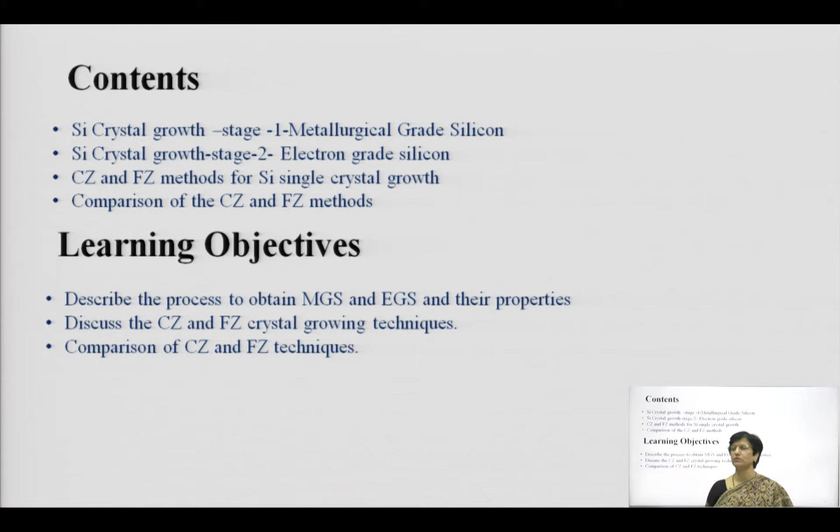The learning objectives are describing the process of silicon growth, which starts with MGS and electron grade silicon preparation, and finally being able to compare both crystal growth processes: the Czochralski crystal growth process and the float zone process, that is, comparison of both processes available for silicon growth.

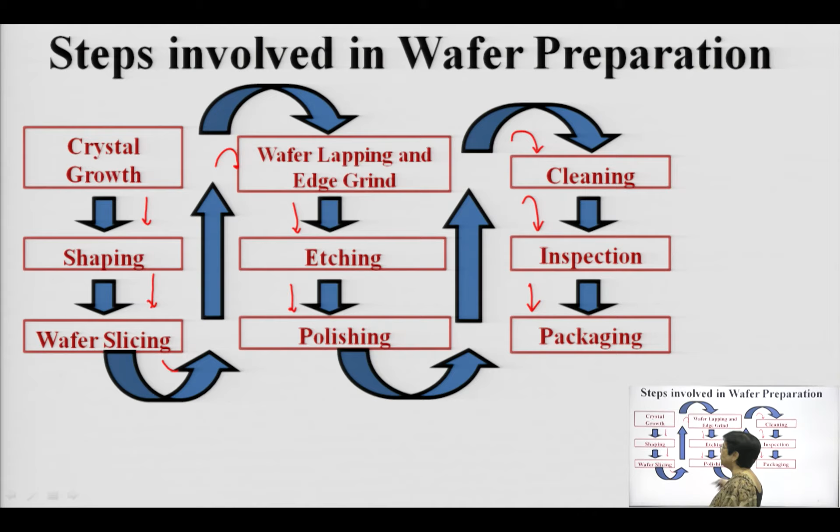How does the growth process start? It starts with single crystal silicon getting formed, followed by shaping, then wafer slicing, then edge cutting for identification marks, then etching and polishing to a mirror polish so wafers become as shiny as a mirror. At every stage there is a cleaning process, then inspection of wafers, and finally packaging. These are all the steps involved.

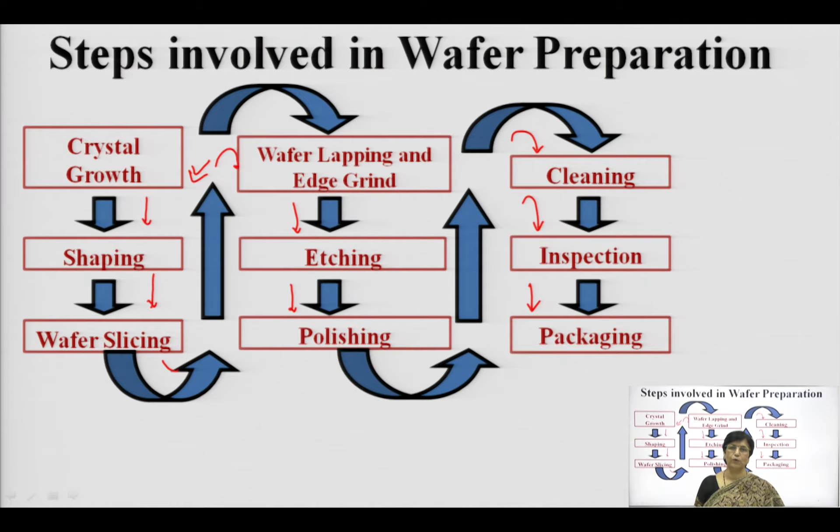Out of all these steps, in this lecture we will first focus on the crystal growth stage, where a single crystal is grown right from sand. So how is that done?

Stage 1 is obtaining sand. This sand is obtained from the clean beaches of Australia, and it is basically from the earth's crust. The sand obtained is combined with coke and coal, and then heated in a submerged arc furnace up to 1600 degrees centigrade.

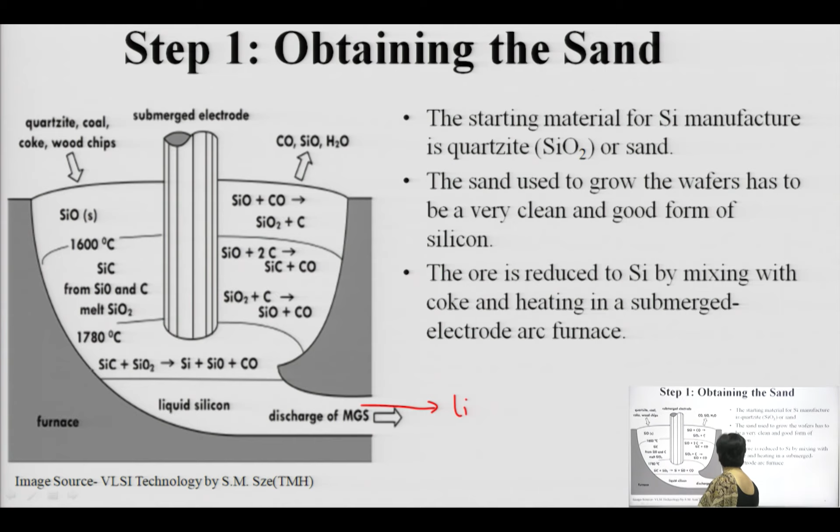This is a very thermally intensive process generating a lot of energy, approximately 13 kilowatt hours per kg, at a furnace temperature of around 1600 degrees centigrade. Here the silicon mixed with coke and coal combines with silicon dioxide, giving us silicon in liquid form, SiO in gaseous form, and carbon monoxide in gaseous form. So we obtain metal grade silicon in liquid form.

This metal grade silicon has a lot of impurities, so we carry out pulverization with this silicon to react with anhydrous hydrogen. In this reaction, a trichlorosilane is formed, which is the most recommended and stable material widely used for preparing silicon wafers. The metal grade silicon reacts with anhydrous hydrogen to give trichlorosilane, with byproducts released in gaseous form.

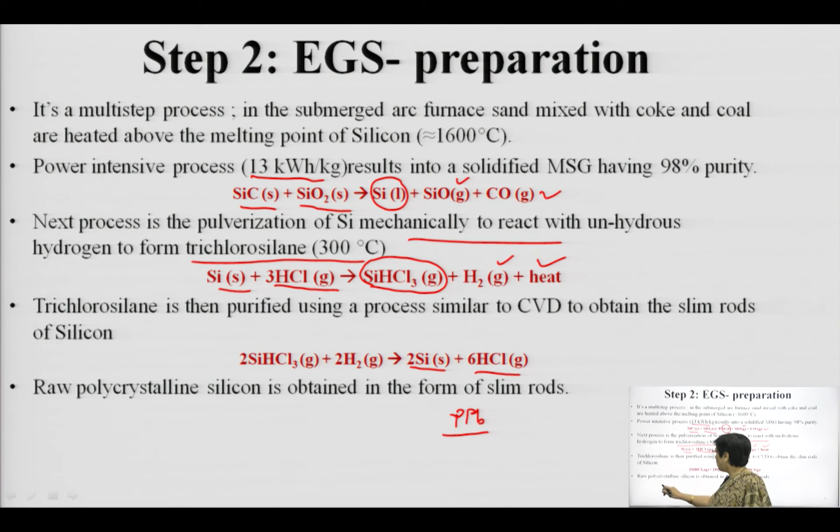The trichlorosilane is then purified to obtain silicon with comparatively less impurity, to the extent of parts per billion, containing some manageable metallic, oxygen and carbon impurities. Another property of this raw polycrystalline silicon is that it is a polycrystalline material in the form of rods; this is the structure in which this material is available.

These materials undergo a further process: from silane we can carry out pyrolysis at 900 degrees centigrade to obtain the same polycrystalline silicon in the form of rods. This polycrystalline silicon is the base material used for preparing single crystal silicon. The advantage of pyrolysis is that byproducts can be easily disposed, and it is cost effective and less expensive, which matters since worldwide consumption of silicon is so large. Therefore we prefer this economical process, and pyrolysis is preferred.

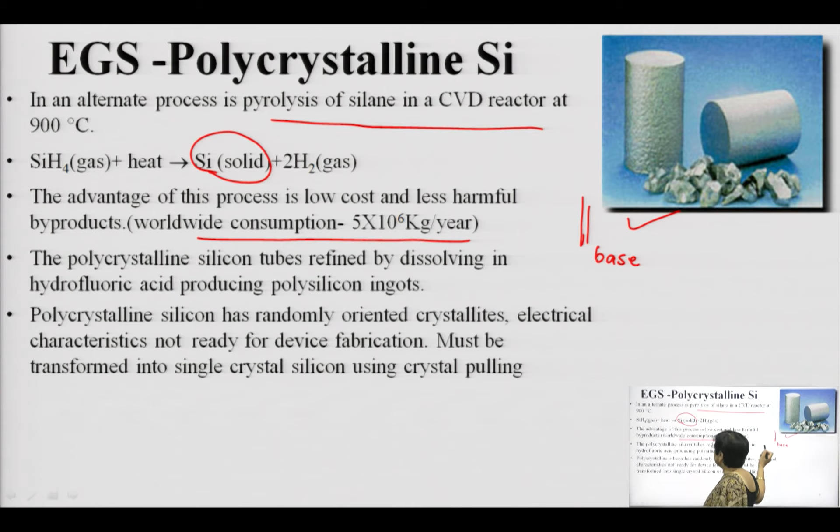These crystalline, multicrystalline, polycrystalline silicon rods are then crushed, and subsequently we proceed to produce high purity polycrystalline rods, which can have impurities such as arsenic, boron, phosphorus and antimony.

It is melted at 1400 degrees centigrade in the quartz crucible. Molten impurities that still exist will slowly get deposited in the molten silicon, and slowly the single crystal silicon wafer will be grown. The process is called silicon growth because from the molten substrate you are having a crystal getting grown or developed, and this is the furnace known as the Czochralski furnace, which is used for this particular purpose.

Now there are 4 factors, please remember, 4 factors which are governing the entire design, and those we are going to see subsequently. But this is the main process which is widely used, globally used, for preparation of pure single crystal silicon or monocrystal silicon.

Now it is somewhat similar to what we used to have, Buddhika ball, in the earlier days when we were young. In that Buddhika ball also, that person used to have sugar syrup and dip one stick, then rotate that stick, and have this strand of sugar getting deposited on it, and we used to have that Buddhika ball getting created. So this is somewhat similar to that.

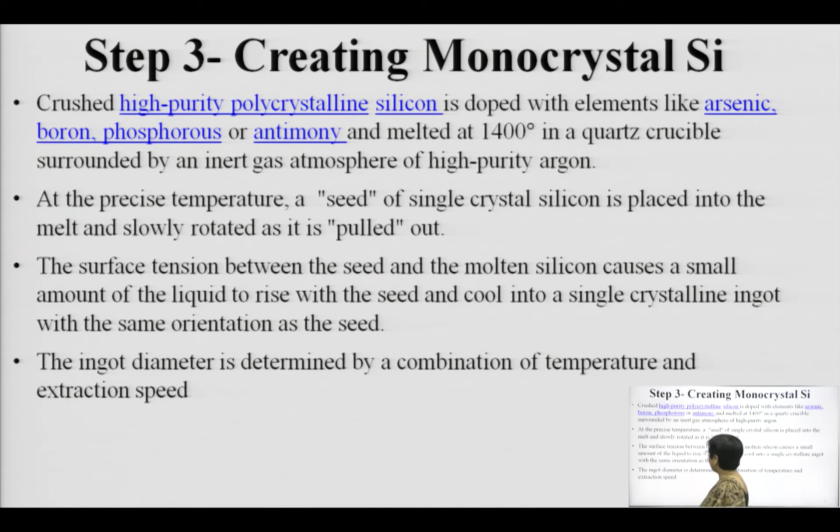You are having molten silicon, and inside this you have a dopant, and this dopant will give you the flexibility to design, develop, or grow the silicon. Molten silicon will be solidified and the crystal growth will happen.

Now the important aspects we need to study in this case, the very first thing is the crucible. Since the molten silicon is at very high temperature, higher than 1400 degrees centigrade, the material used for the crucible has to be chemically inert. That means the material should not release any impurity into the molten silicon at that high temperature.

Secondly, the height and diameter also should be good, and that is how it is theoretically proven. There are a lot of calculations going into the dimension design, and the proposed design largely used contains approximately 60 kg of molten silicon, with a height of 45 centimeters, and a wall thickness of around 0.25 centimeters.

Thirdly, the chamber in which this entire molten silicon is present should be chemically inert, because any impurity can contaminate the molten silicon. As it is at high temperature, the reactivity at high temperature can further contaminate the molten silicon, and the same impurity can get introduced into the single crystal being grown.

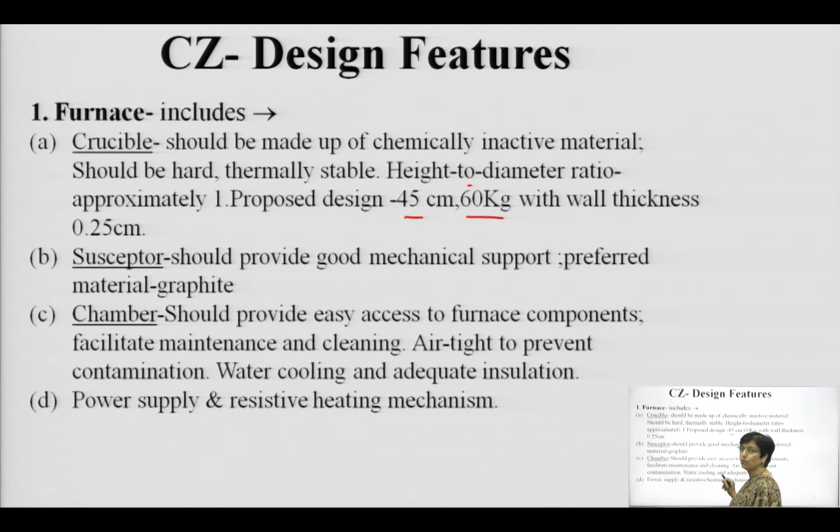The second aspect of design considers the crystal pulling mechanism of this CZ process. In this process, the seed crystal that you are going to immerse into the molten silicon has to be held in a very stable manner by a chain and pulling mechanism which lifts the seed crystal at a defined or precise rate. Any jerk can damage the orientation of the crystal.

So this particular feature is very important, the system should be very stable - the chuck and the rotation. When you are lifting the silicon ingot or seed crystal, you are at the same time rotating it, one going clockwise and the other anti-clockwise, because unless you rotate it there will not be uniform deposition as it solidifies and grows slowly. If you do not have the proper pull rate, any negative pull rate will melt this seed crystal back into the molten silicon. So we do not want that to happen, and therefore the pull rate is very important.

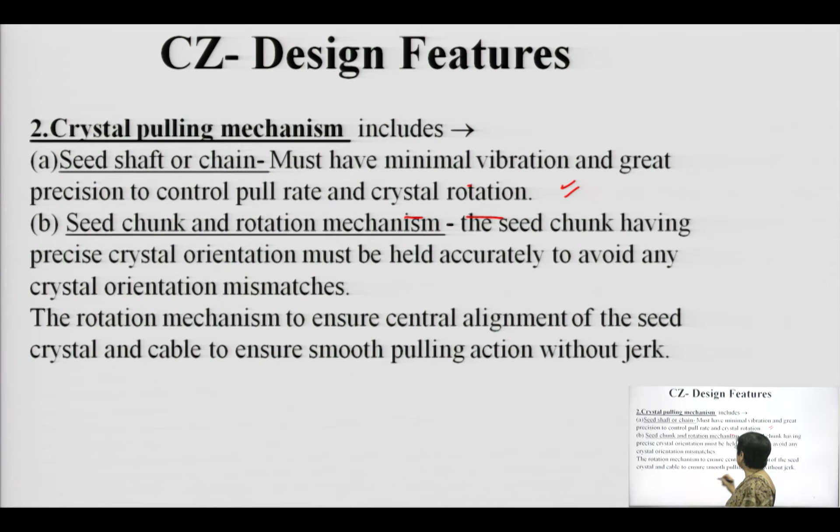The seed chuck, which is held by the chain pulley mechanism, has to be very stable and precise, and the orientation or rotation mechanism should exactly ensure that the central alignment of the seed crystal exists throughout the process. Third and the most important thing is the ambient.

Any gases which you are controlling for cooling or using for cooling, or driving away the byproducts, should be all inert. The entire system should be vacuumized and you should have minimum contamination. The use of inert gas is encouraged for driving away those byproducts, and the purge tube through which the wafer or seed crystal is inserted and taken out also needs to be properly isolated from the furnace.

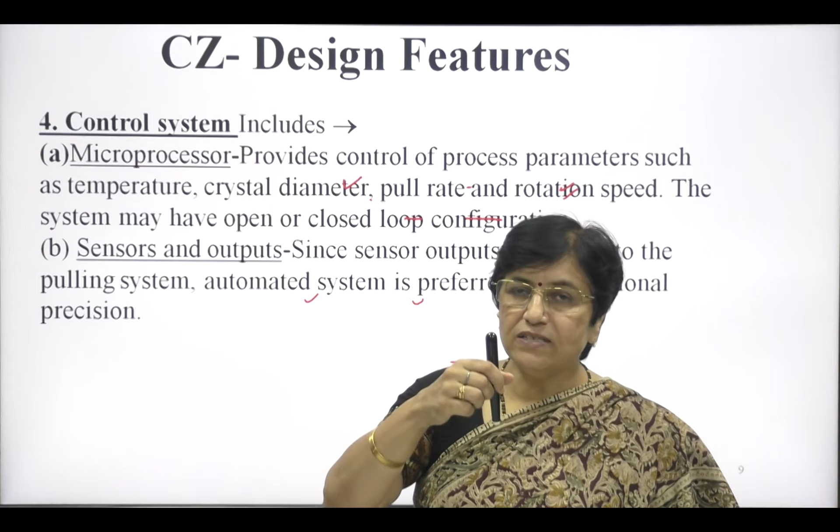Lastly, the entire control mechanism, wherein you have the stable crucible rotation, the crystal pulling mechanism, the chain pulley mechanism which is lifting the crystal while simultaneously controlling its rotation, all that mechanism should have minimum intervention of human beings. All these processes need a lot of precision, and therefore it is essential to have a complete microprocessor-based or automated system to take care of this mechanism.

Now, I gave you the resemblance—it is just like sugar candy getting produced from molten sugar. Similarly, from molten silicon, this solid silicon is getting formed. Whatever orientation this seed crystal has, the same orientation crystal growth will happen, and the rate has to be exactly controlled—there goes the mathematics behind this crystal growth mechanism.

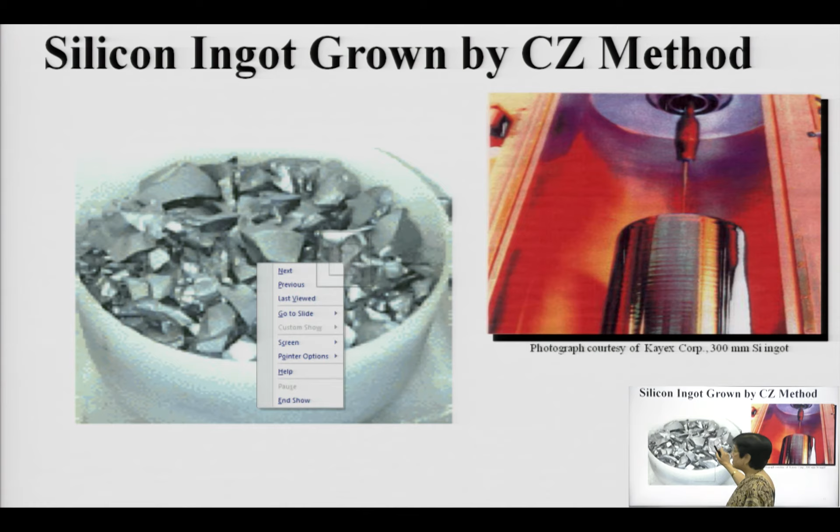So this is the original polycrystalline silicon, and this is the final ingot. In between, the processes happening are being depicted: the seed is dipped into the molten silicon, then lifted slowly—this is how the ingot is formed, and this is the final ingot being formed here.

So right from polycrystalline, you have developed pure single crystal—single crystal silicon wafer. So this is the single crystal silicon wafer; you have gone for monocrystalline. So what is the mathematics behind it? As an engineer you must know what is happening in it, what exactly is the process.

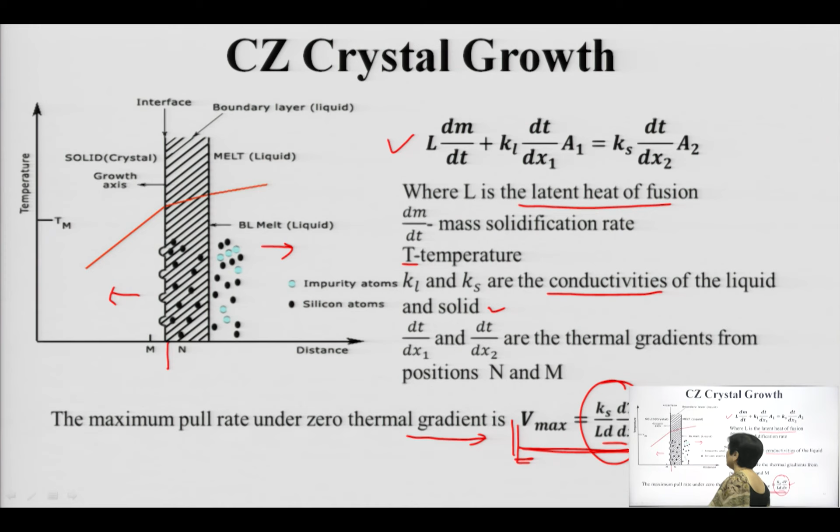Another mathematical analogy you need to study to control the growth rate is the equilibrium distribution, or segregation coefficient. This segregation coefficient is defined based on two factors, Cs and Cl. Now, what are these Cl and Cs?

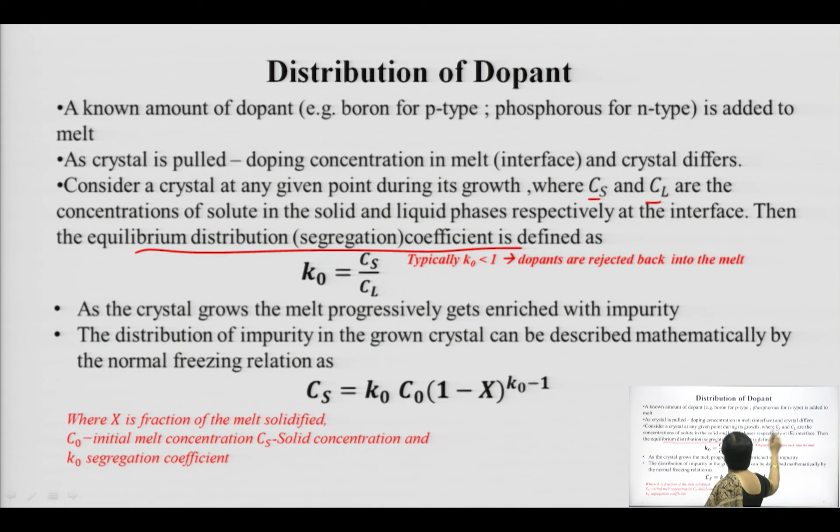These are basically the solubilities you can say, or these are basically the concentrations of solute in the solid and liquid phases respectively. As you know, the molten silicon has impurities in it.

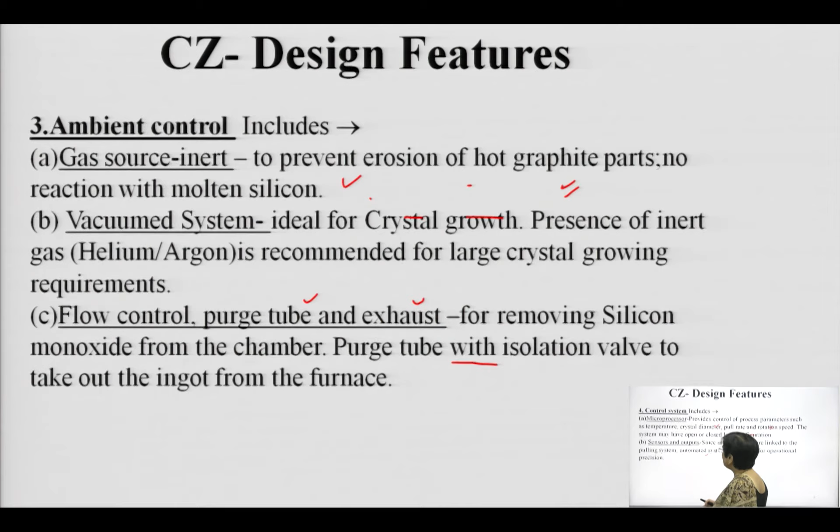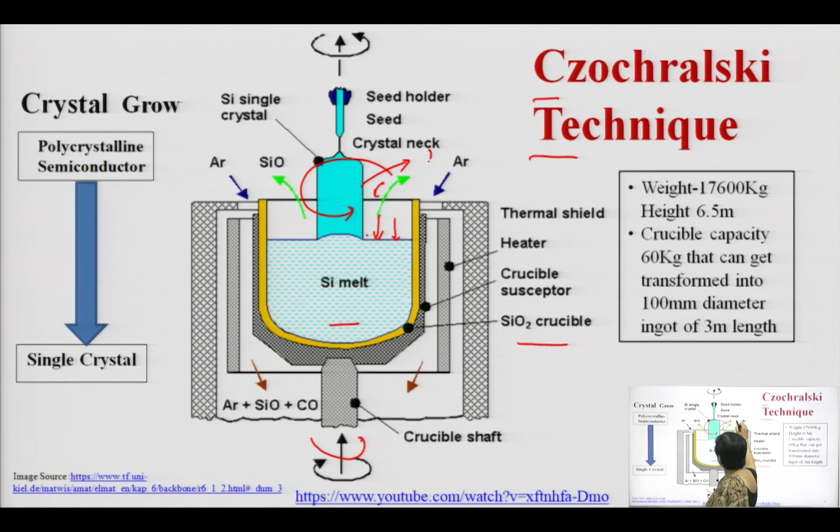As the silicon growth happens and the crystal grows slowly, the crystal will be in pure form and the concentration of impurity in the crystal will increase slowly as growth happens. That means, when my crystal growth is happening or when my crystal is completely formed, I need to know when I'm supposed to stop. That means, this growth till what point of time I need to grow, till what point I need to stop this growing process, is being defined by this particular equation, and this equation gives you clarity about it.

So, therefore, you need to know the equilibrium distribution or segregation coefficient. This coefficient decides the ratio of solid phase solute, whatever concentration of solute is available in the solids, and concentration of solute available in the liquid phase. This ratio is always typically less than 1, because dopants, as the silicon solidifies, the dopants or impurities are rejected, and more and more impurity concentration in the molten silicon increases as the crystal growth process happens, except for oxygen and carbon many times. For some applications, you try to keep it this way.

As the crystal grows, the molten silicon is enriched with impurities, and you need to know that means at first, when the process starts, you will have pure crystal. As the growth process happens for a time interval t, the impurity addition into the single crystal keeps on increasing as the crystal grows, and therefore, the maximum point, this is the final point you need to know, is the normal freezing relation. This freezing relation defines till what depth or till what rate you need to grow the crystal, and what is the concentration increase or rate at which the concentration increases in the molten silicon.

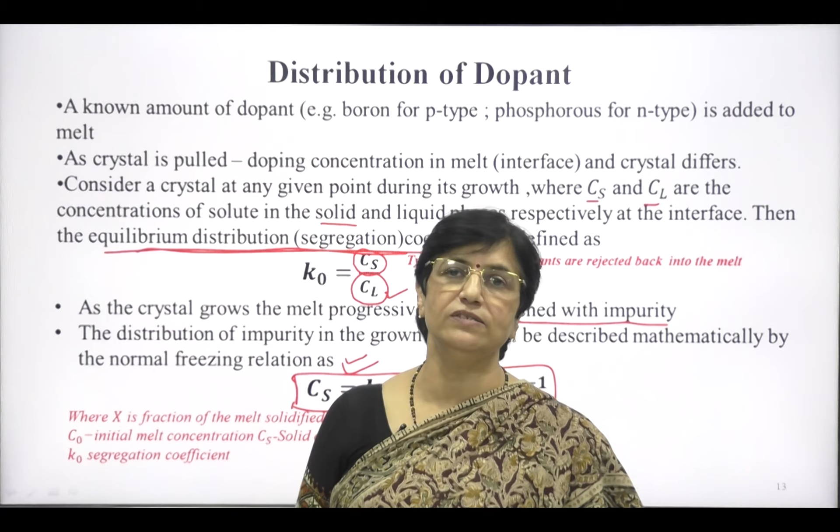This is basically x, the distance for which the crystal is grown, and this distance is an essential component in the growth process. You have to remember that negative growth indicates the seed getting molten into the molten silicon, or basically you are having the reverse process. Growth happens because the seed crystal and the solidification of silicon increase the seed crystal, and therefore we call it growth.

So this is how the similar orientation of the seed happens, and this particular equation gives you the idea up to which you need to continue the crystal growth process, because when the impurity increases you need to stop, since that silicon ingot becomes of no use. Therefore, this freezing relation is important to check what is the growth rate or how much crystal can be grown from the amount of molten silicon kept in the crucible. So this equation is basically K0 into C0 into 1 minus x raised to the power K0 minus 1.

Now, K0 is nothing but the ratio of impurities in the solid and liquid, and this ratio is equally important in deciding the growth of the silicon ingot from the molten silicon. So, C0 is the initial melt concentration, Cs is the solid concentration, and K0 is the segregation coefficient, as we have already studied.

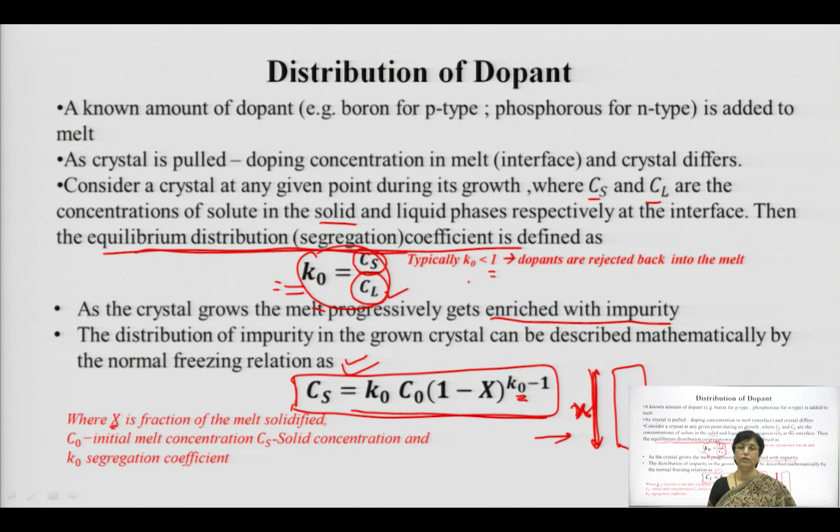So this mathematics basically gives you the idea of the rate at which the silicon wafer or silicon ingot can be grown with the help of the seed crystal from the molten silicon, and within the molten silicon the ratio of impurities in the solid and liquid decides the segregation coefficient. So that ratio is also very important. Along with it, the maximum pull rate is also important, as we have seen in the earlier equation. So all these factors will decide the amount or height of the ingot which is getting formed, as well as the diameter of the ingot which is getting formed.

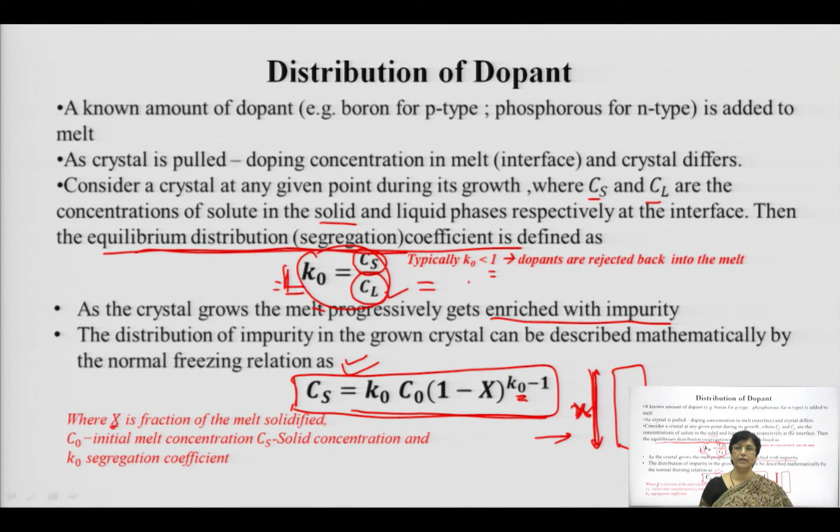Another process in this crystal growth is the localized heating process, known as float zone crystal growth process. Now, instead of a crucible, in this process we have RF coils which are heating the polycrystalline ingot, and this polycrystalline ingot is locally heated.

Locally you are creating a molten area, and from that molten area you bring the seed crystal in contact with it. Again, pull rate and the segregation coefficient and other factors come into picture, and the same thing is done, but rather than holding the molten silicon in a crucible, we are heating it locally.

From that local heating area we are growing the seed. Now what is the difference? Here also you have inert gas flowing to drive away the byproducts, the molten zone is confined, and you do not have any crucible to hold this particular molten silicon.

The ingot is the same, the seed crystal is of the same orientation, and it is the product which decides the growth rate. Apart from the localization in heating used for melting the silicon, most of the other parameters or mathematical analogies are almost the same.

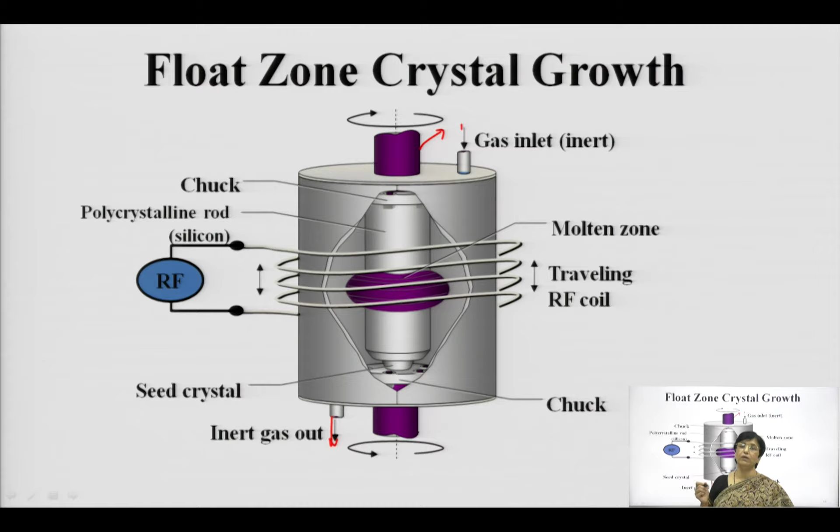Only thing is, since the crucible is not being used, there has to be a lot of precision involved in pulling the seed crystal, because the area is confined. The main difference between the float zone and the normal processes is that, since the area is limited,

the crystal which is being formed is of high purity, and such crystals or wafers fabricated or prepared from float zone methods are used, or find their applications, in power devices and precision detector applications.

It is highly transparent, okay. It is highly transparent to terahertz radiation, and is often used to fabricate optical components such as lenses and windows, for operating them in the terahertz range.

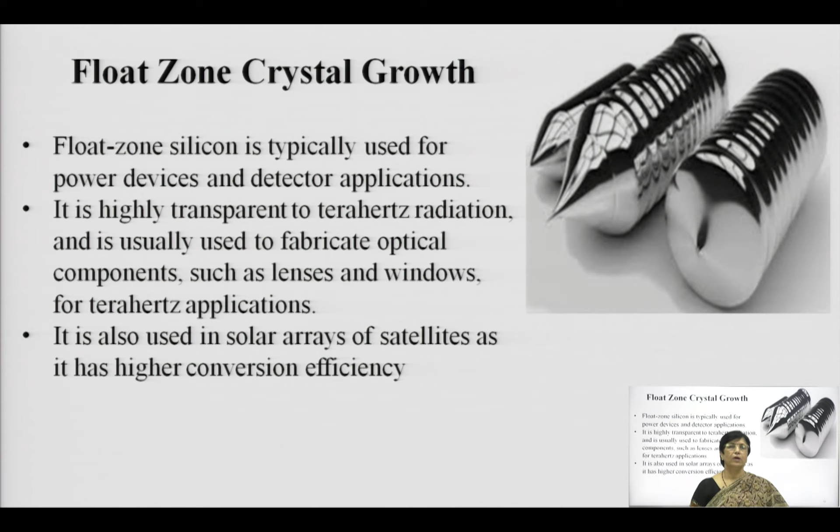Such particular wafers are also used for solar arrays and high efficiency, energy efficiency applications.

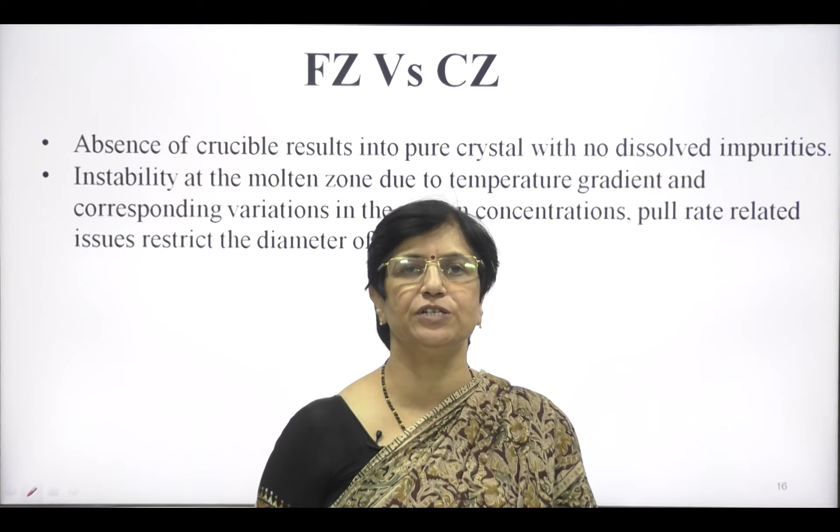But there is a lot of precision involved, because there is localized heating, the pull rate and the precise control on the seed crystal holding contact area. That is what we have seen, the solidification area which is decided by the segregation coefficient, and the contact area decided by the interface between the solidification and molten silicon, where the solid seed crystal and the molten silicon come in contact.

That area has to be very precise, there has to be uniformity in contact surface, and the rate at which the solidification is happening will precisely define the crystal pulling rate or seed crystal pulling rate.

Since there is minimum area coming in contact, any minutest instability or variation in the temperature gradient or in the contact surface can create instability and damage the crystal orientation, or the deposition can get hampered, thereby impacting the nature or quality of the crystal being grown.

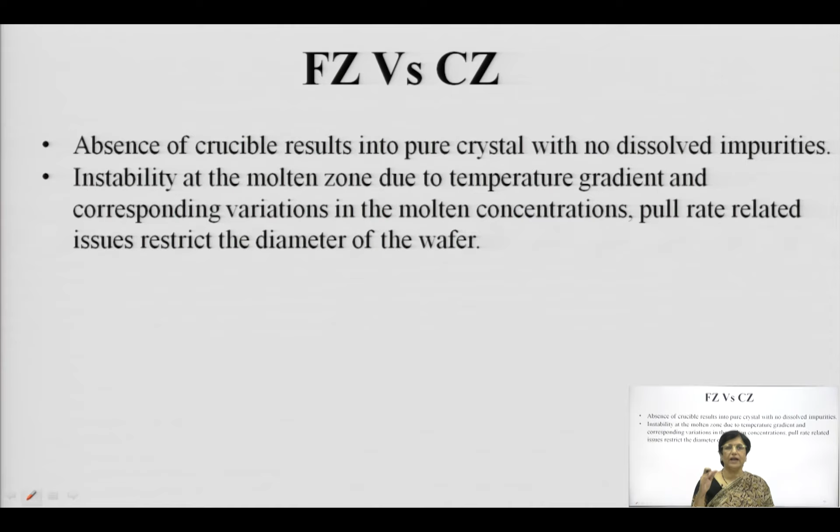So rather than monocrystalline, you will have deformities or dislocations or some impurities, point impurities, surface impurities getting incorporated in the growth process. So you have to be very careful about the pull rate and the contact getting established between the seed crystal and the localized molten silicon area.

So before we end, let us summarize by answering the following questions.

The first question you should be able to answer is the preparation of metallurgical grade silicon, which is prepared from sand. Second, you should be able to describe how the metallurgical grade silicon transformation takes place into electronic grade silicon

by pulverization process, or bringing it in contact with anhydrous hydrogen chloride, or you have something known as the CVD process.

Then thirdly, and the most important part of this lecture or this particular topic, is the growth process happening through the CZ process, in which all the four components, that is furnace, pull rate, the entire ambient temperature, and the microprocessor based system which is controlling the entire process happening within that CZ growth process, has to be clearly remembered along with the schematic of the CZ furnace.

Then what is happening in the FZ process, and the difference between CZ and FZ crystal growth processes. If you can answer all these questions, describe the CZ process and FZ process completely, you are ready to move further into the process of wafer preparation, which we are going to study in the third lecture.